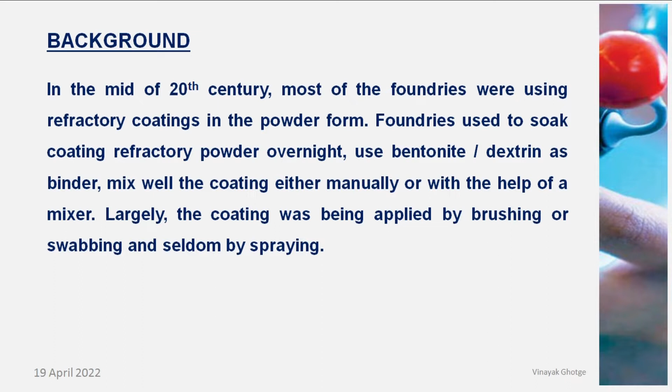I'll just go through a background because it's required. In the mid of the 20th century, most iron foundries were using refractory coatings in powder form only. Foundries used to get refractory powders like zircon, graphite, and they used to use either dextrine or bentonite as a binder, soak the powder in the binder overnight, and then use a mixer or even a small mixer so that they could use this coating. Mostly these coatings were used by brushing or swabbing, and seldom by spraying.

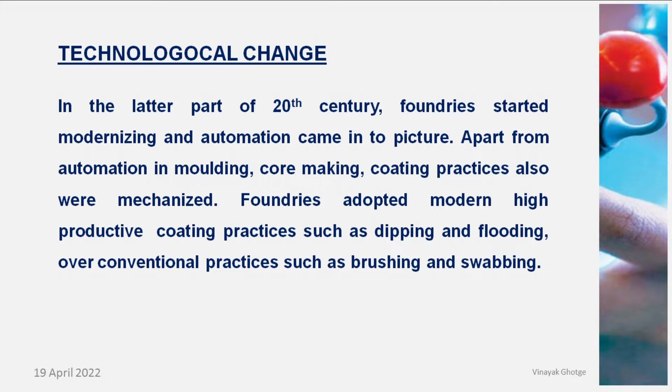Technological change: in the later part of the 20th century, foundries started modernizing and automation came into the picture. This automation was not only in terms of molding and core making, but also in the coating process. Foundries started adopting modern coating practices like dipping and flooding over conventional practices such as brushing and swabbing, because of the consistency in coating parameters and because of high productivity.

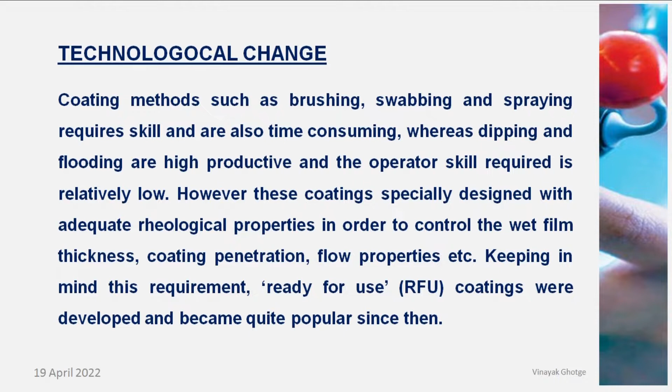Coating methods such as brushing, swabbing or spraying require skilled operators and are time consuming as far as productivity is concerned. Whereas processes like dipping and flooding are highly productive and the operator skill required is relatively low. However, such coatings are specially designed with adequate rheological properties in order to control the wet film thickness, coating penetration, flow properties, etc. Keeping in mind these requirements, ready-for-use coatings were developed, meaning coatings in ready-for-use or paste form, and these coatings became very popular.

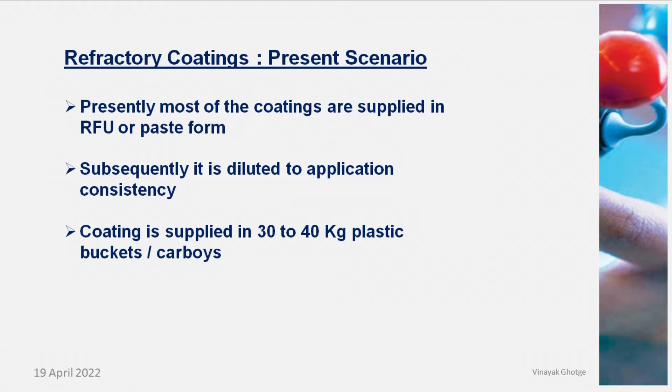So the present scenario in refractory coatings is that most coating suppliers supply coating either in ready-for-use form or in paste form. Subsequently on the shop floor, these coatings are diluted to the required application consistency for dipping or flooding. Such coatings are normally supplied in 30 to 40 kg plastic carboys or buckets.

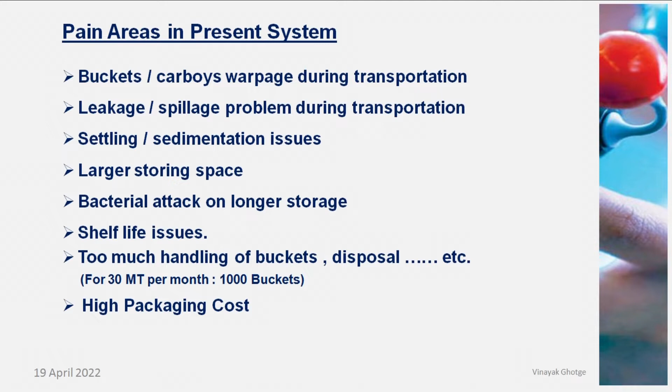There's too much handling of the buckets. Most automotive foundries or bulk coating consumers use coating to the tune of 30 to 50, even 60 tons per month, so the number of buckets handled is quite high, and that's really a non-value-added job. And of course there's the high packaging cost — the kind of water-based coatings used by most automotive foundries for general purpose and critical applications are priced such that about 15% of the selling price of the coating constitutes packing cost.

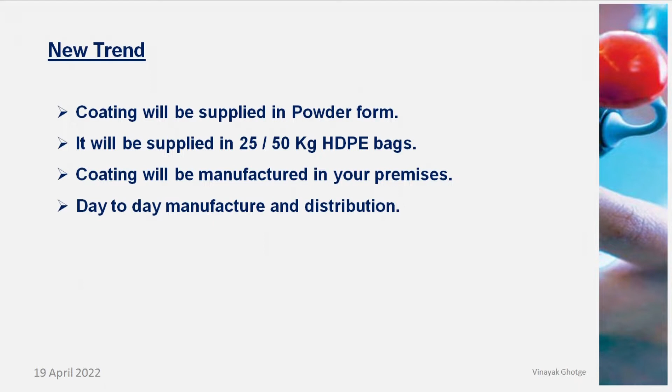So what is the new trend now? The coating can be supplied in powder form, supplied in about 25 kg bags, very easy to handle. The coating will be manufactured in foundry premises, and day-to-day manufactured fresh coating will be distributed to the core shop for use.

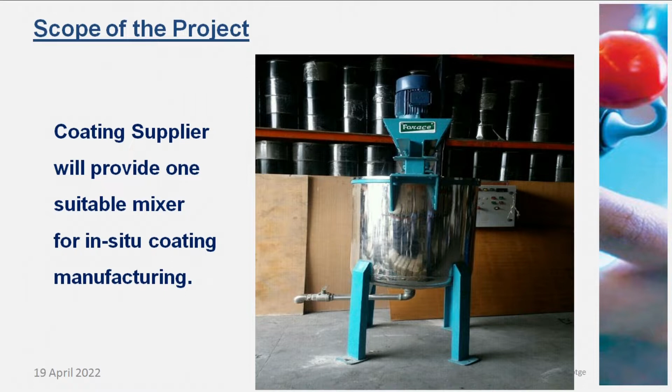Coating manufacturers normally, along with the product, will supply you a coating mixer, because such kind of coatings cannot be made by a normal homogenizer mixer commonly used by foundries for homogenizing the coating after dilution. This powder coating requires a special mixer with a special stirrer and blade design. These are the kind of mixers we provide.

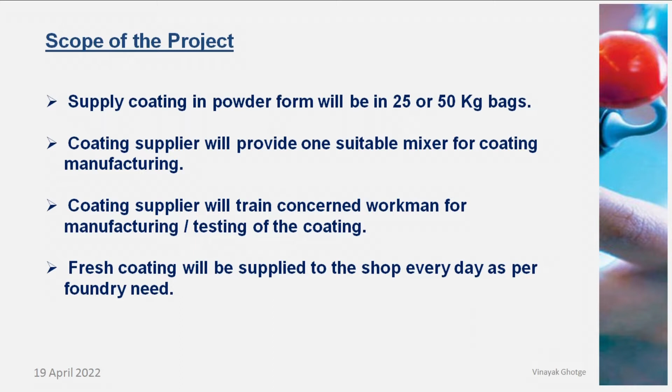The coating will be supplied, as I told you, in powder form in about 25 kg bags. We also supply a mixer for coating manufacturing. The coating supplier will also train the workman for manufacturing and testing the coating on the shop floor. This is required for the initial purpose. Once the parameters are set, it's a stereotype operation, and the fresh coating will be supplied day to day.

The support required from foundries for this is allocation of a suitable space for mixer installation so that the product handling is much efficient and better, a laboratory for initial testing purpose till the parameters are standardized, and manpower for coating manufacturing.

What are the advantages of using powder coating versus ready for use or paste form? First is the supply of coating just in time. A fresh lot every time, so there is no aging, no bacterial attack, no shelf life issues.

And the most important point from a storage perspective is that less than 50% of the storage space is required, because these are all bags which can be stacked one over the other. The powdered product has a shelf life of 1 year, and unless it is tampered with or gets mixed with water, the product doesn't deteriorate. So there are absolutely no shelf life issues for the product.

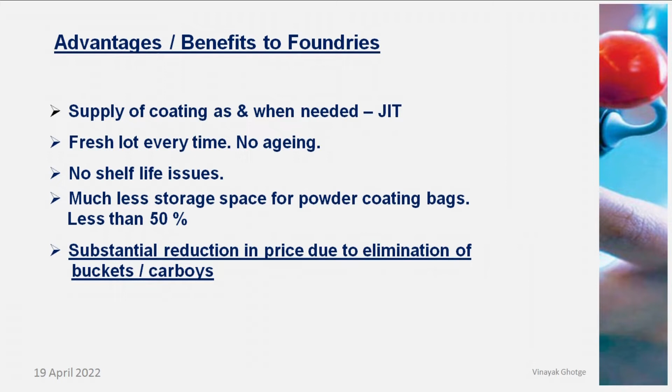The most important reason for using powder coating is the substantial reduction in price due to elimination of packing material. Packing material in such coatings normally acts as a means of transport of the product from one place to another; it doesn't really add any value to the product. So if we are able to eliminate it, we are able to pass that benefit on to the customer.

Let's look at the financials. Presently, most foundries use aluminum silicate ready-for-use coating with a landed cost of around 31 to 32 rupees a kg. The powder coating which we will now offer will have a budgetary price of around 54 rupees per kg. This price may vary foundry to foundry based on the product used, but it will be roughly around the same price.

1 kg of powder coating will yield 2 kg of ready-for-use coating. So the effective price of the powder coating will be about 27 rupees per kg. Hence, the saving in RFU coating itself is about 4 rupees per kg.

Now you can slightly add certain things like the electricity used by foundries, but this is very nominal - the cost of electricity cannot go beyond 5 to 10 paise per kg. It's hardly about 3 to 4 units per day. As for manpower used for making the coating, most automotive foundries already have a man allocated who prepares the coating and distributes it to the coating tank. The same man can be used for coating manufacturing, so there is no additional cost involved.

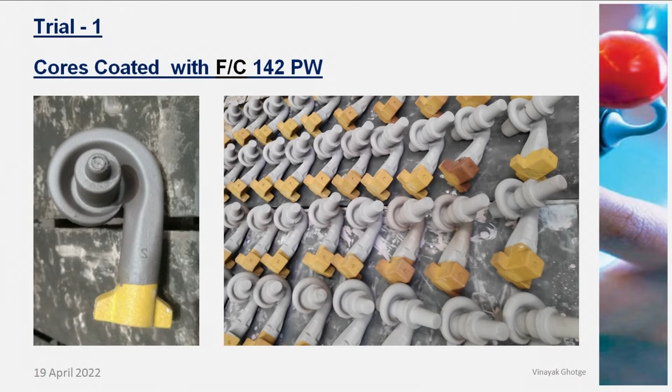These are the cores coated with powder coating made in situ. And this is the casting photograph where you can see the clean casting.

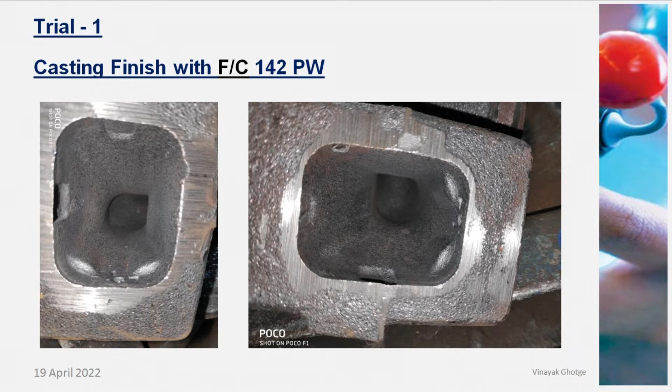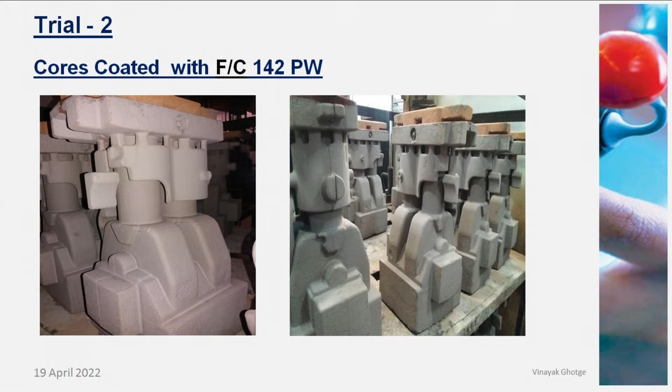The second trial we have taken is again a critical casting. It's a water jacketed 2-cylinder block, and here also the coating is used by dipping process. Viscosity is around 14.5 seconds, and these are the cores which are dipped using the product, and this is the casting finish what we have got.

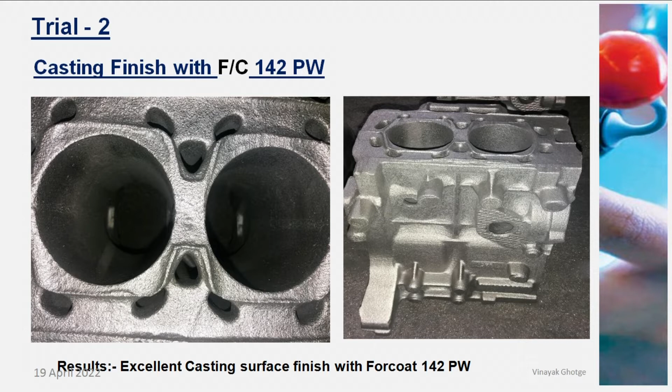The third trial we have taken is one of the foundries who are producing bigger castings like transmission housing weighing around 175 kg, and the coating is used here by flooding process. So first was dipping, this is flooding process. You can see the cores coated by flooding. The wet film thickness was around 200 microns, and you can see the casting finish inside. It's absolutely clear, no sand sticking.

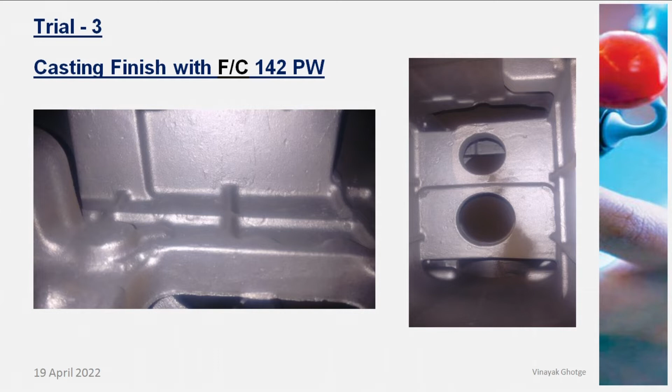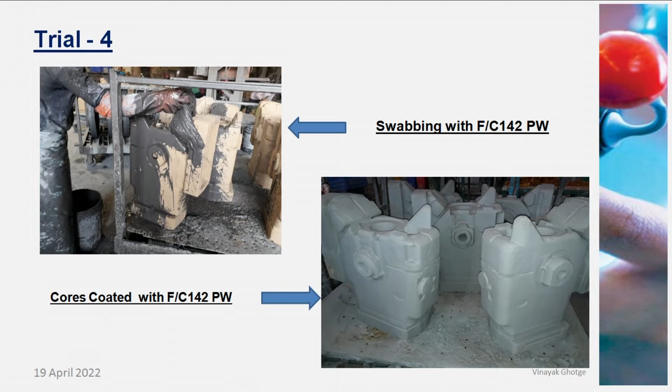One more trial of transmission housing only, but here the coating application is by swabbing. You can see the core being swabbed in the first photograph, and in the second photograph the coated cores, and you can see the casting finish inside. It's absolutely clean, no sand sticking.

This coating, the 4 trials photographs I have shown you, was aluminum silicate water-based coating. Now the trial I am going to show you is a zircon-based coating which is used on larger castings. This was a trial at one of the big foundries.

The casting weight was about 3.5 tons, and the product was used by brushing application. The as-made coating Baume was over 100, which was then diluted to about 75 Baume for brushing. Specific gravity was about 1.95.

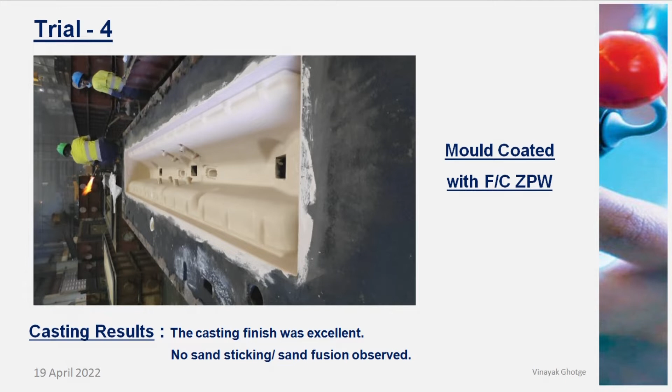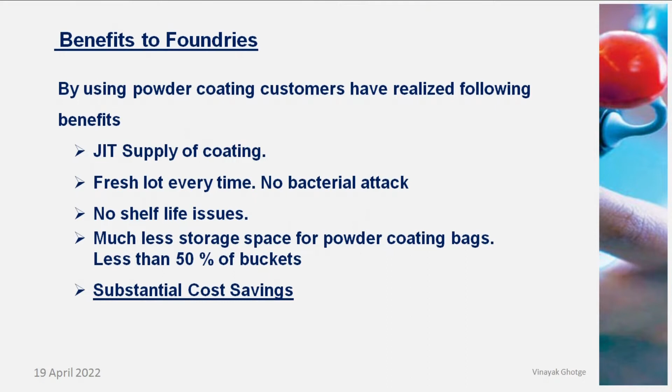The benefits to the foundries using powder coating technology is just-in-time supply of coating, fresh lot of coating every time, no bacterial attack, no shelf life issues, very less storage space required, and substantial cost savings, which is most attractive to most of the foundries.

To conclude, from the trials I have shown above, it is evident that in-situ coating preparation using powder coating technology not only helps foundrymen use it on all types of castings of any size, but also yields substantial cost savings, which will help foundrymen increase their profitability. Thank you, this was my presentation.

Yeah, any question please? Hello. My name is Brijesh and I'm from Siemens. I have two questions. First question is for the full mold casting process: is any specific refractory coating required in comparison with sand castings? My second question is, as you saw on that surface finish, does the coating method or different kinds of coatings improve the surface finish, and how?

I'll answer your first question. For full mold process, the coating required is definitely slightly different than what we use for sand casting. First, in full mold process, the coating has to be highly insulating. Second, the coating has to be a good permeable coating, because in full mold process you don't remove the EPS pattern material. When you pour the casting, EPS burns out and produces some kind of slag which should ooze out from the coating layer—otherwise it will give you inclusions in the casting. So that coating calls for a different type; it is not a regular coating used in automotive applications for dipping or flooding. Second, these coatings are used at a little higher Baume because coating thicknesses typically used in automotive foundries are anywhere between 200 to 500 microns depending on the criticality of the casting. But in full mold process, the coating thickness is anywhere between 1 to 2 mm, sometimes 3 mm if casting thicknesses are very high. So the coating is totally different and has to be designed differently. Your second question, can you please repeat again?

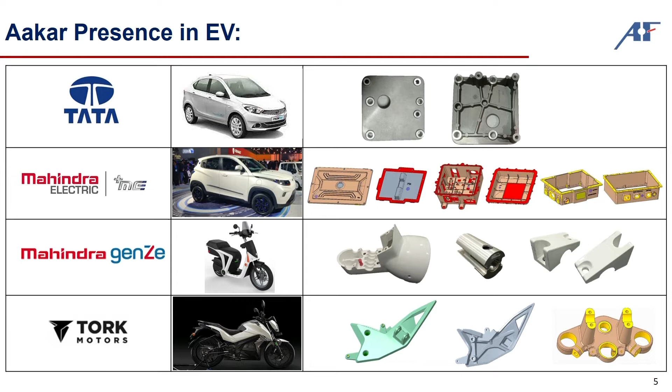Our EV journey started in 2015 when we first produced some parts for the Mahindra GenZe vehicle, which was sold in the United States, Silicon Valley. We produced the headlamp housing and its assembly structure.

Now we are also supporting two-wheelers with a customer named Tork. They have recently launched the first electric motorbike of India. We also got new business from Bajaj Auto for their Yulu project, which is like a moped, similar to the TVS moped.

Our serial production for Tata Motors EV, the Tigor, is produced in the Sanand plant, Gujarat. We have started its production since last 6 months, and we are also supplying parts to Mahindra Electric for their KUV electric vehicle.

Here you can see some images showing how the part looks. All are aluminum castings made through gravity, low pressure, and high pressure die casting processes.

Recently there was a world committee, all leaders in Davos. They have declared their net zero carbon emission goals. We know the transport industry contributes to a very large extent of carbon monoxide and carbon dioxide, which creates health issues and is killing the environment. So the EV push from world leaders is natural.

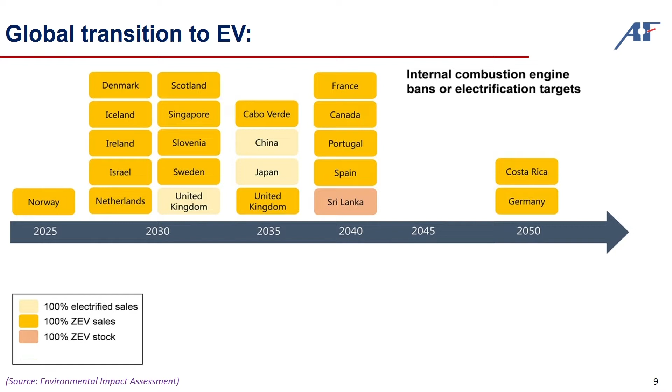We know that Scandinavian countries are now front runners in introducing EVs, and most new car purchases in Norway, Finland, and Sweden are in EV form only. European leaders have committed that most of them want to bring electric cars by 2030.

To make EV happen, there are various subsidies provided globally by each country to their OEMs, with incentives for infrastructure and monetary benefits.

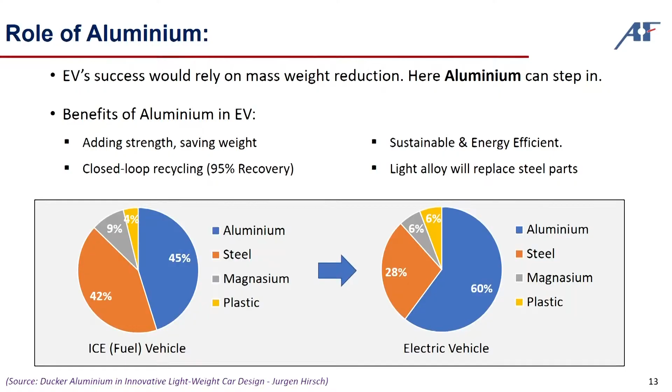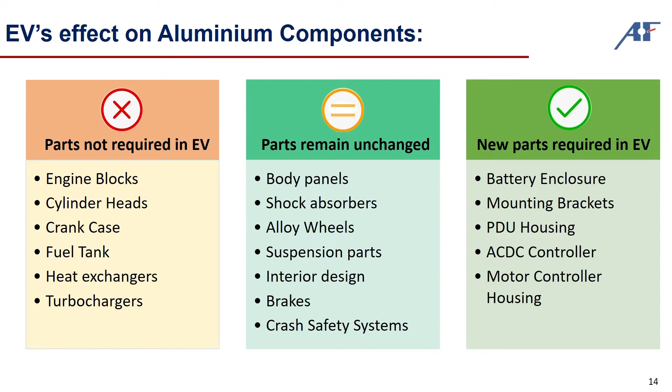This is a simple diagram showing which parts will not be required in EVs, some parts that will remain unchanged, and new parts like battery enclosures, mounting brackets, motor enclosures, covers, and ECUs that will be required. As I mentioned earlier, some of these parts we have already started producing for Tata, Mahindra, and Bajaj Auto.

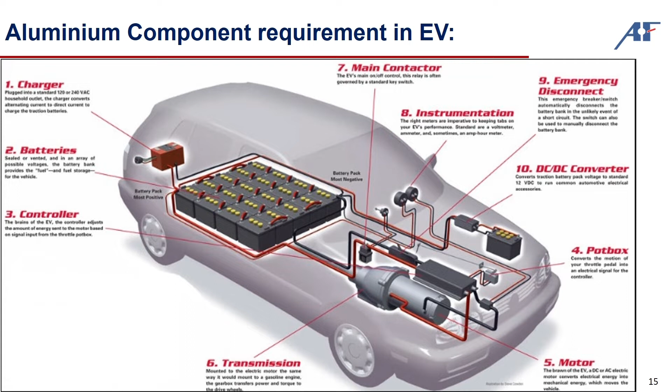This is one schematic diagram of a car, how EV will work, how the components will be placed. See, charger, batteries, controller, transmission. So very few parts. Normally a car requires around 300 parts, and it will get reduced if an engine with 200 parts gets replaced by 30 parts. So it will be a huge challenge for foundries.

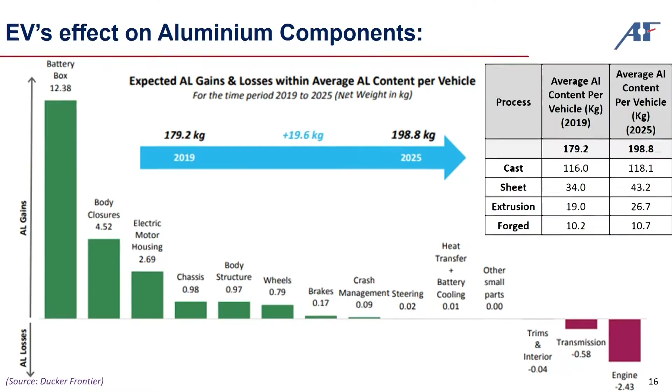This is the last slide of the presentation. What will aluminum foundries have to do?

Since the last 28 years I am in this field, and most of my experience goes in business development. I can sense that risk of idle capacity for big foundries will be a big risk. Capacity will remain idle, meaning parts like engine covers and transmission cases will reduce.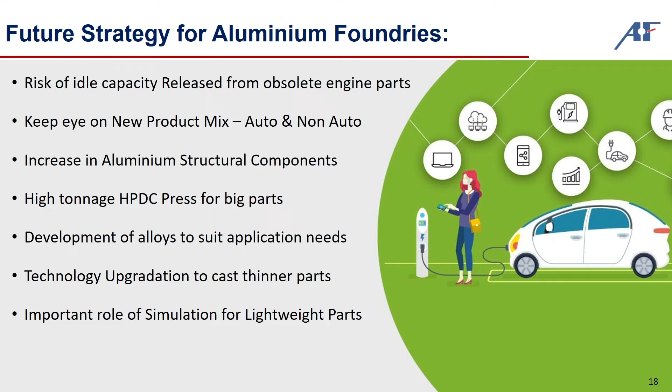Now around 75% of India's vehicle sales is two-wheelers, and 80% of two-wheelers will be EV by 2030. By 2025 it should be around 40 to 50%. So the big suppliers carrying presses of size 250 ton, 400 ton, 660 tons like this will have huge idle capacity with them, and this can be a problem for the upcoming new foundries, small foundries.

Foundries will have to go with a new product mix. Akar Foundry changed its product mix from 80% automotive, 20% non-automotive to 55-45%. So this will be the reality. Very quickly, non-auto segment business must be taken up by the aluminum foundries.

Those who are dependent on two-wheelers have a major threat. They need to move swiftly. There will be many aluminum structural parts coming, which will require high tonnage presses. So the demand for good high pressure die casting machines will be bigger. For a player, one of my friends from Norican is here, so they will have a good opportunity here to sell their big presses of Italpresse.

Development of new alloys, which will have better strength. Technology will have to be upgraded to cast thinner parts. Now it is around 3 to 4 mm. Customers may demand 2 mm to 2.5 mm general wall thickness. And all this will call for simulation of lightweight parts.